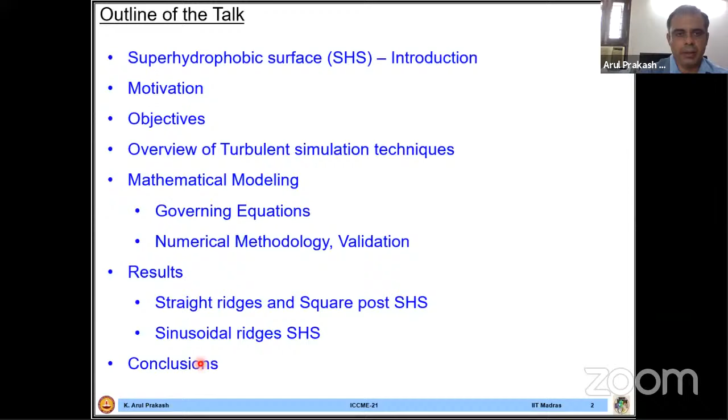Mainly we are focusing on the governing equations, the numerical methodology, and validations. Finally, we will discuss three types of superhydrophobic surfaces - two types available in the literature and scientific community, called straight ridges and square posts. And finally, we have developed a novel superhydrophobic surface in our laboratory using our past experience, which I'm going to present, showing how it is advantageous over the other two surfaces present in the literature, followed by the conclusions.

So basically, what is meant by superhydrophobic surfaces? This is a micro textured substrate with surface treatment. For example, it is available in nature in many leaves, like lotus leaves and taro leaves, and also in the wings of certain insects.

What is the advantage? When you pour water on this superhydrophobic surface, the water will not stick over the surface. So it is something like waterproof. We take this as an advantage because over this layer of the leaf or wing, there is a small layer that will resist the mixing of water with the leaves. So with the help of superhydrophobic surface, about 99% of dirt on the surface is washed away, and therefore we keep that surface almost all the time clean.

And what is the advantage is we can reduce the drag. If you coat the superhydrophobic surface and expose it to some fluid flow, we can see that compared to a normal solid surface, this superhydrophobic coated surface will have about 70% drag reduction. We control the turbulent boundary layer - in controlled experiments we have theoretically proved, and practically more than 50% drag reduction is feasible by coating these superhydrophobic surfaces.

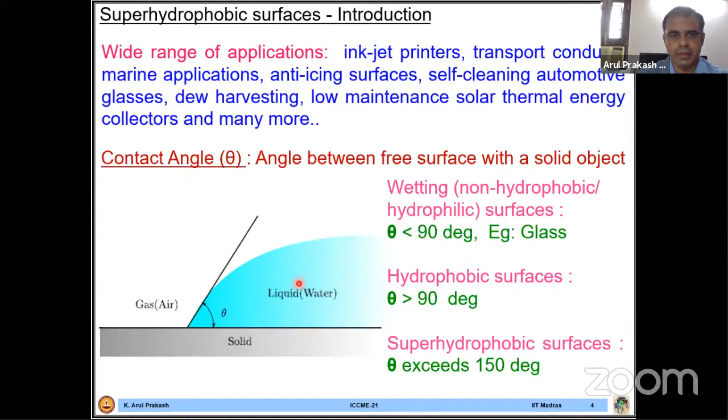So these are the small ridges, which are structured using lithography or other techniques, then we put them on the surface. That is called specifically engineered microscale structures. So the structures shown here are called ridges. You can see there is a small continuous line - this is a no-slip line, meaning flowing across the surface - and this is a post. I'll show a better picture in the next slide, showing the difference between the ridges and the posts.

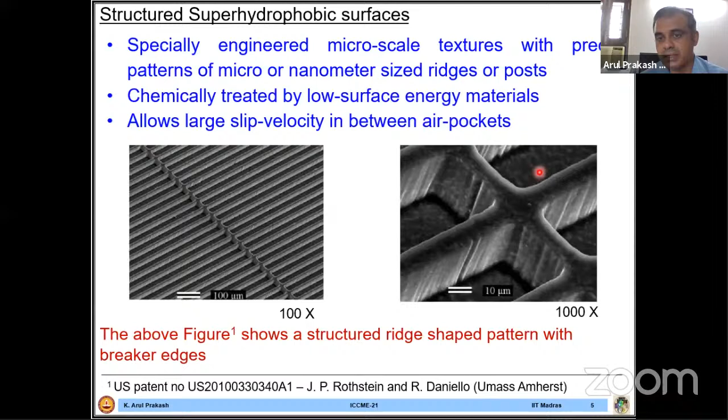So the main thing is it allows slip velocity in between. You can see there is the ridge wall, and in between this ridge wall there is an air gap. That creates a large slip velocity in between these air pockets. Similarly, in the case of posts also, you can see these are the air pockets.

So there are two types of super hydrophobic surface states available: one is called the Wenzel state, the other is the Cassie-Baxter state. In the Cassie state, this is a drop and this is the super hydrophobic surface - if the drop is not penetrating the surface, it is called the Cassie state, due to small scale surface roughness which prevents the water from penetrating.

So mainly now we are focusing on applications with respect to water, so I'm showing examples with reference to water. The small scale surface roughness prevents the water from moving into the space, resulting in an air-water interface. This is called the Cassie state, and this is truly super hydrophobic, with significant drag reduction in both laminar and turbulent flows taking place in the Cassie state.

The next one is called the Wenzel state, where the drop penetrates into the textured surface, meaning water penetrates into the corrugations of the surface. What happens in the Wenzel state is sometimes it ends up with detrimental effects, like either a drastic drag increase or sometimes no drag reduction at all. That's the difference between the Cassie state and the Wenzel state.

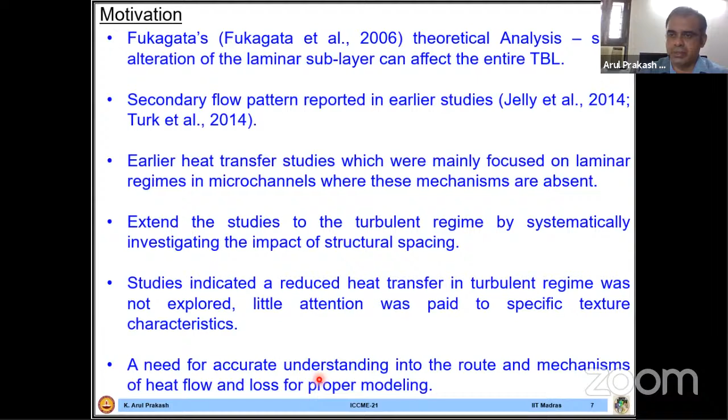So an accurate understanding of the root mechanisms of heat flow, mainly the flow characteristics, and in turn the heat transfer, mass transfer, or any other passive scalar transfer, is very much essential to use superhydrophobic surfaces in industrial or scientific applications. So that forms the motivation for our study to analyze the superhydrophobic surface. We have taken two surfaces from the literature, and one which we modified, which has enhanced performance compared to the structures present in the open literature.

So with those motivations, we have framed the objectives, that is, to investigate the effect of feature spacing on drag reduction and heat transfer over superhydrophobic surfaces using direct numerical simulations. I will also discuss different types of turbulent simulation techniques. Why did we select direct numerical simulation? Because other models will never extensively capture the physics of the superhydrophobic surface. Therefore, we are using DNS to critically assess and compare the fluid flow and thermal performance of streamwise aligned ridges and posts.

Okay, the first one is straight ridges and then square posts, aligned along the streamwise direction. So first we are going to assess and compare the fluid flow and thermal performance characteristics of streamwise aligned ridges and posts. And finally, with this knowledge, we have designed a new novel structure called sinusoidal ridges. We want to understand the effect of spatial modulation of superhydrophobic surface texture on fluid flow and heat transfer in the sinusoidal structure. So this is what we designed.

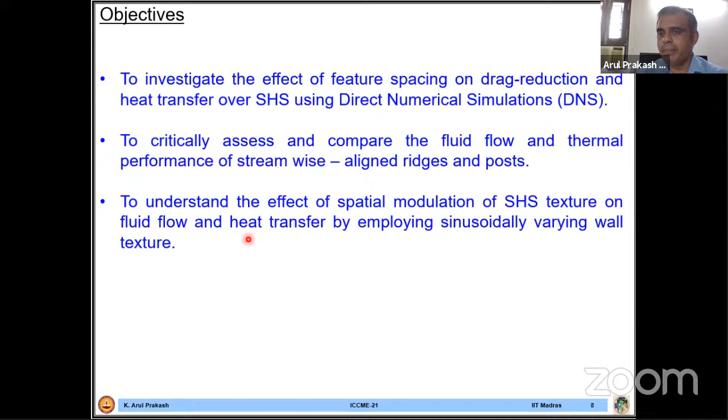So these are the main three objectives. First, we understand the effect of feature spacing on drag reduction and heat transfer over some specific superhydrophobic surfaces, mainly streamwise-aligned ridges and posts. And finally, we are going to see the effect of sinusoidal ridges on fluid flow and heat transfer, comparing with streamwise-aligned ridges and posts, and how it is advantageous for practical applications, mainly in terms of drag reduction and enhancing the heat transfer.

So with this understanding, we adopted a technique called direct numerical simulation. Why have we taken this direct numerical simulation technique? To discuss this, I will give a small introduction, just an overview of simulating a turbulent flow. The turbulent transport is mainly due to the vortical motions, that are called eddies.

You can see similar kinds of structures in our clouds. Sometimes if you look at the sky, these kinds of structures are visible. This is mainly due to the interaction between the high-speed fluid and the low-speed fluid.

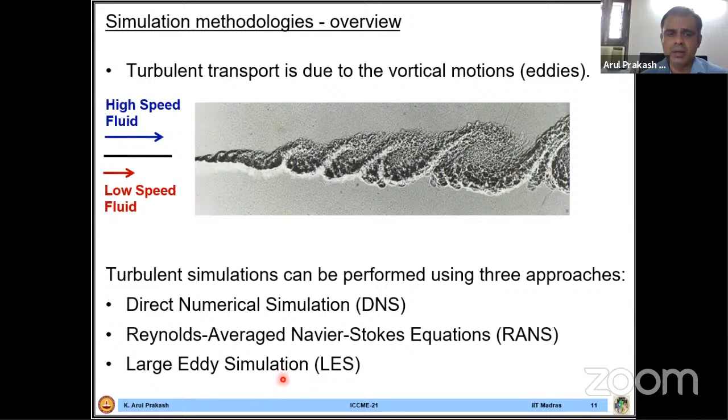So turbulent simulations can be performed using three approaches. One is called direct numerical simulation, which we are going to use in the study. The second one is called Reynolds-averaged Navier-Stokes equations, that is RANS. And the third one is called large eddy simulation, that is LES.

So what is DNS? DNS gives the full description of all the eddies. The complete description of all the eddies present in the flow domain can be captured with the help of DNS, the direct numerical simulation. Obviously, the penalty is that we have to invest a lot of computation. The computational cost is enormous in the case of direct numerical simulation.

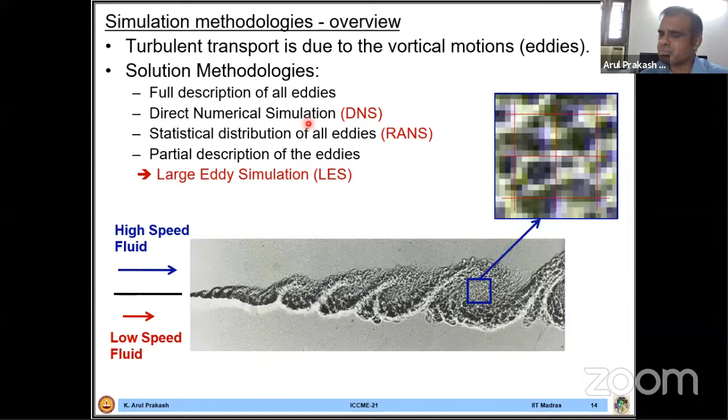And you can see that only in direct numerical simulation do we capture the complete structures of the turbulent flows. We are looking at the very micro level, and both LES and RANS are unable to capture all the structures near the sublayer level. Therefore we are using direct numerical simulation for our simulation.

Why we are using direct numerical simulation is that it gives multi-point and non-invasive information. We also get information about the frequency and the wave number. And there is no modeling at all, unlike the subgrid scale modeling in RANS and LES. We do not have any modeling in the case of DNS. Therefore, we will have increased accuracy.

We can see that if you repeat the simulations, more faithful reproduction of the flow physics is achieved with the help of direct numerical simulations. So therefore, we proceed further to model the super hydrophobic surface using direct numerical simulations.

So these are the governing equations. This is the continuity equation. Because it's water, we are assuming it is an incompressible fluid. So therefore, the governing equations are the Navier-Stokes equations. This is given by the unsteady term, convection term, the pressure term, that is the source term, and the diffusion term, and this is the continuity equation. And this is the energy equation, the convection term, and this is the diffusion term.

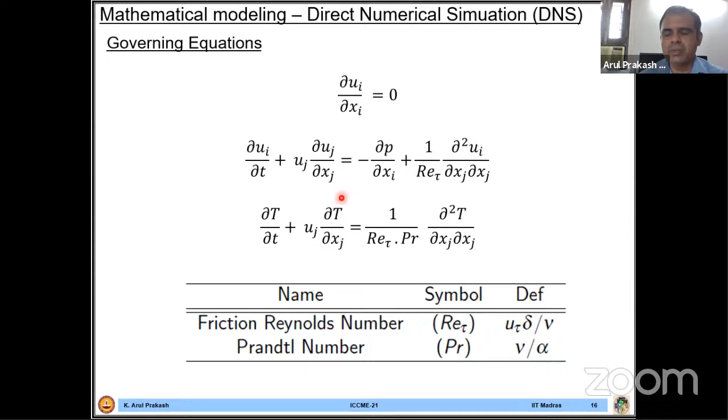And we are non-dimensionalizing this. So therefore, we are getting a term called the Reynolds number based on tau, that is called the friction Reynolds number. The velocity we are using is not the actual velocity, but the friction velocity, and the Prandtl number is the ratio of kinematic viscosity to the thermal diffusivity. And here U_i is represented as a tensor. So U, V, and W are the velocities along the X, Y, and Z directions. So we are considering Cartesian coordinates for solving this problem.

And some details about the turbulent quantity: U tau is given by the square root of tau W by rho, where tau W is the shear stress and rho is the density. In the inner layer, very near to the wall, the turbulence is universal, so independent of the rest of the flow. It behaves more like a laminar sublayer, because most of the turbulent disturbance created will dissipate in the form of heat because of the viscosity. So it depends mainly on the viscosity and the viscous shear stress near the wall.

And the friction velocity is given by this quantity. Tau W is mu into dou U by dou Y by using Newton's law of viscosity, and mu by rho, that is nu, and U bar is the mean velocity, and this is the length scale which is given by nu by U tau. In the outer layer, the influence of the viscosity becomes negligible, so we can see large structures along the outer layer, whereas near the wall it is mainly the laminar sublayer.

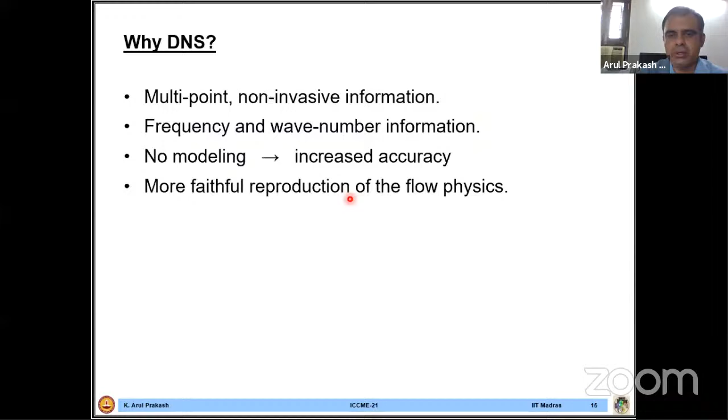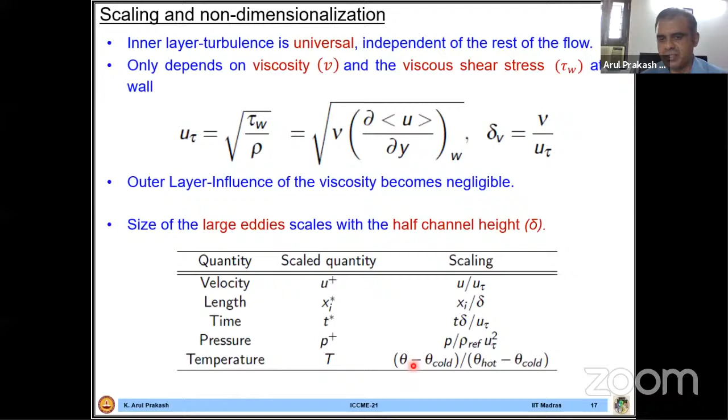So for the size of the large eddies, we are defining different parameters. We have taken the height of this super hydrophobic channel as 2 delta, so we take the half width of the channel, delta, as the characteristic length, both in the case of straight ridges and the square posts. Based on delta, we define all the quantities. So U plus is given by U by U tau, the length along the streamwise direction is given as xi star, time t star, the pressure P plus, and the temperature T, according to the scaling given on the right hand side.

So these are basically the two structures we are going to see: one has straight ridges and the other square posts. We fix the Reynolds number because, based on the literature, most studies happened at a friction Reynolds number Re tau of 180. Therefore, we fix the friction Reynolds number as 180, and the flow is driven by a pressure gradient along the streamwise direction. We give a constant pressure gradient in the streamwise direction, proportional to the friction velocity, that is rho U tau squared by delta, so that there is a velocity along the streamwise direction.

If you closely look into the surface, this is the width of the free slip surface. The distance between the two ridges is given by L, half of this is the free slip region, and half of this is the ridge length, which is given by W. We always take W equal to L. We are proceeding with this, but in practical situations this can also be varied. This is a simple assumption we have taken for solving the problem easily.

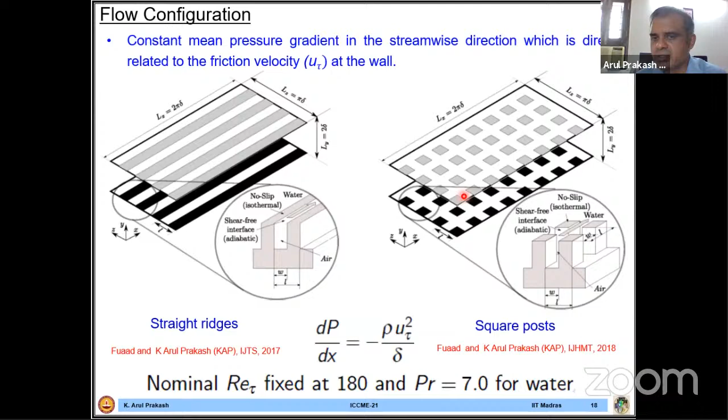And the length of the channel, because it's periodic along the streamwise and spanwise directions, we are defining in terms of pi. The length of the streamwise direction is 2 pi delta, the length of the spanwise direction is pi delta, and the height is 2 delta. These are some of the geometry specifications of this domain, and you can see the free slip region and the no slip region along the spanwise direction in the case of ridges, whereas in the case of posts it is there in both the streamwise and spanwise directions.

And these are the boundary conditions. Along the ridges, the black patch, the velocities U, V, and W are equal to 0. Along the interfaces, the white region, we have the free slip and no penetration boundary, given by dou U by dou Y equal to 0, V equal to 0, and dou W by dou Y equal to 0. That is a general free slip boundary condition given to any channel flow.

And we are heating the bottom plate in order to study the temperature variations. We heat only the no slip region with temperature T equal to 1, and the top surface is kept at the ambient condition, 0. These are non-dimensional, therefore we represent them as 1 and 0. Along the liquid gas interface, we take it as adiabatic. There is no heat transfer between the fluid and the solid surface. We always assume this is a Cassie state where the drop is not penetrating into the solid surface.

So this is the computational scheme. We have used the finite difference scheme with a fractional step method based on Kim and Moin. This is a semi-implicit time advancement. The viscous terms use the Crank-Nicolson scheme, and a second order explicit Adams-Bashforth scheme is used for convection. A fourth order central difference energy conserving scheme is used for all the spatial terms.

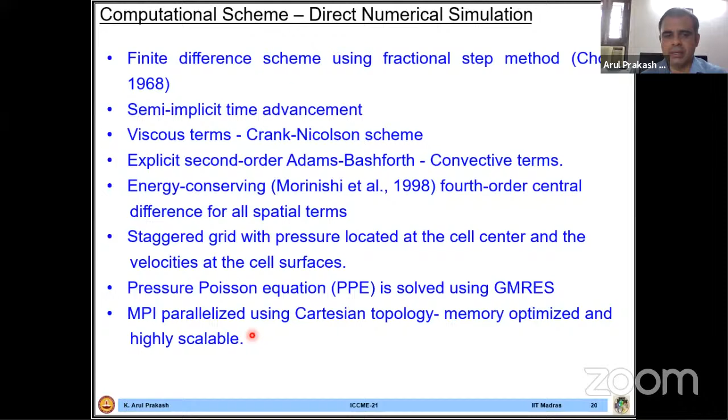And we are using a staggered grid. This is how we store the variables: the pressure is stored at the cell center, and the velocity is stored at the cell faces. The pressure Poisson equation is solved using the generalized minimal residual method. And we have also parallelized using MPI, message passing interface.

And this is the typical computational grid. This is the ridge we are showing here, and you can see the magnified image of the ridge, how fine the mesh is, so that we can capture the complete structures using our direct numerical simulations. We call this unit y plus, that is nothing but y u tau by nu. The value of y plus is almost equal to 0.1.

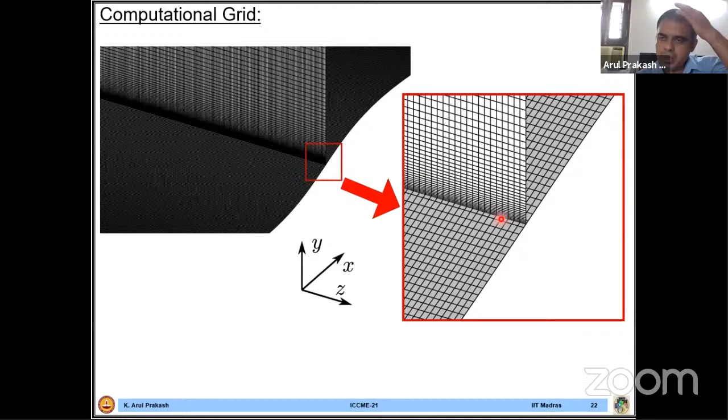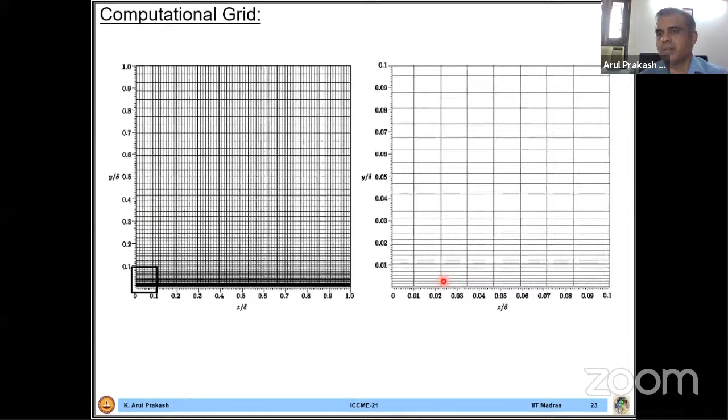And this is the typical wall normal direction, and this is your wall. The magnified view of the wall is here, so you can see 0.001 along the z direction, the spanwise direction. Along the y direction, you can see a small region covered with so many grid points, with the value of y equal to 0.1. Therefore, y plus is still a small value of the order of 0.1.

To do the validation, we have taken a simple channel. The flow is coming here, and we have taken periodic conditions along the streamwise direction and also the spanwise direction, and we are comparing the velocity.

And only in the bottom, we are giving a superhydrophobic surface. The general surface we are keeping, to see what is happening to the superhydrophobic surface, whereas in the top we are having the no slip velocity. So when you have a no slip velocity, you can see that the velocity is 0 near the wall. When you have a superhydrophobic surface, we can see that a small slip velocity is present. So this is the length of the superhydrophobic surface, the height of the superhydrophobic surface, which covers only the laminar sublayer.

So when you plot the velocity, basically it is a parabolic velocity. In the right hand side, the top region is a no slip region. We are plotting the velocity along the streamwise direction along the spanwise distance. So we can see that at the upper wall, at y equal to 2, the velocity is 0.

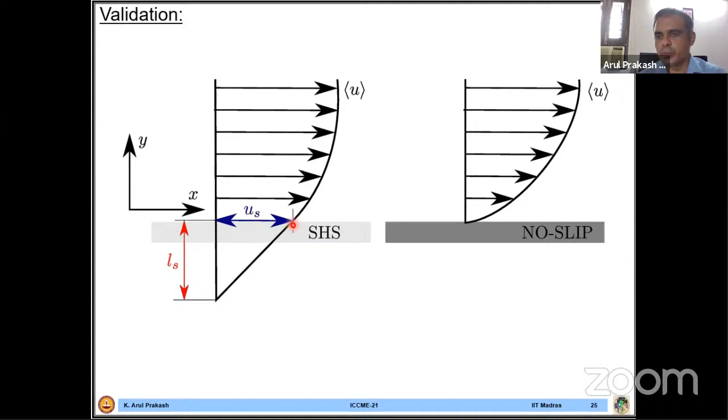Whereas in the left wall, because of the presence of the superhydrophobic surface, there is a velocity which is given by this u s, and this we compared with analytical solutions, that is Martell et al. solutions, and it is found to be nicely matching with the results, and therefore we can tell that our code is validated.

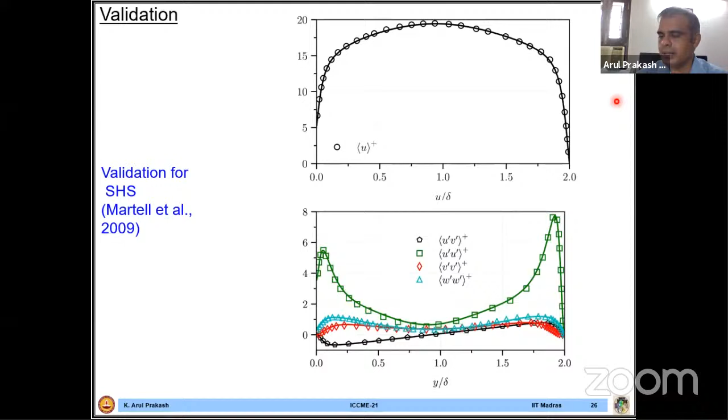And also we have compared different stresses, Reynolds stresses, that is products u' u', v' v' and w' w', and compared with the standard results of Martell et al., and we found the results to be extremely agreeing. Our scheme is good in terms of agreement with the literature data. So therefore, we proceeded further in simulating the superhydrophobic surface using our in-house code.

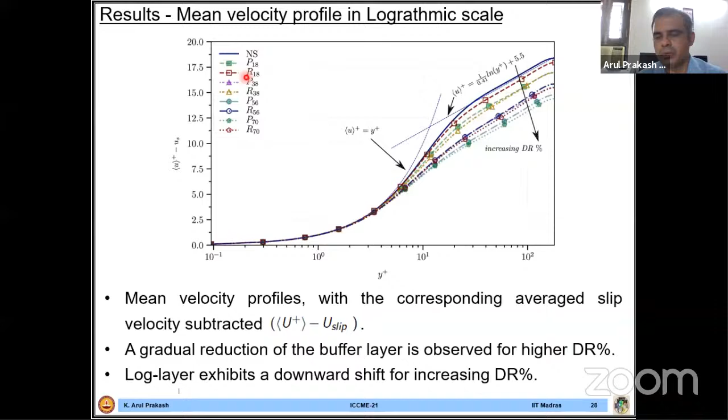Again, you can see that from the buffer layer onwards, there is a decrease in the velocity that will cause the drag reduction. By changing the distance between the posts and the ridges, the drag reduction rate keeps on increasing.

So this is the secondary flow structure. I'm having a no slip region, this is for the ridges and this is for the posts. You can see this secondary flow structure, which is caused by the presence of a no slip versus free slip boundary, and this is happening at a very micro level, only in the laminar sublayer.

Since we are heating at the bottom, we can see the appearance of a thermal boundary layer, but there is no velocity boundary layer present due to there being no wall in the case of the free slip wall, because the superhydrophobic surface has a free slip and a no slip region. Therefore there is no velocity boundary present, but you are observing the thermal boundary layer.

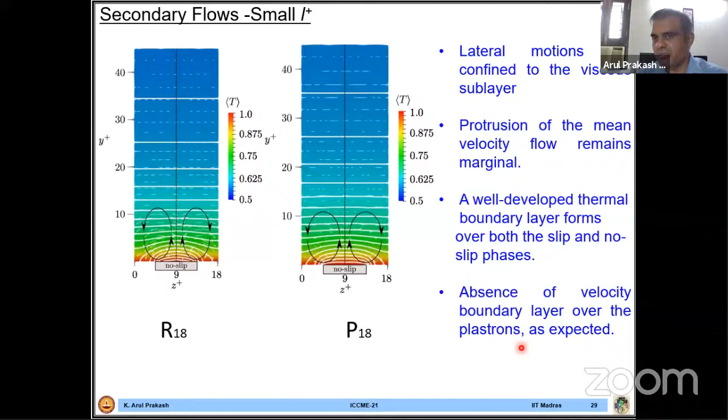The lateral motions are confined to the viscous sublayer, along the span-wise direction. Vorticities are formed, and protrusion of the mean velocity remain marginal. A well-developed thermal boundary layer is developed, whereas there is no velocity boundary layer, due to the presence of the free slip plastrons — this is nothing but the superhydrophobic free slip surface.

So the secondary motions not only help in enhancing the mixing, but will also help in reducing the velocity profile. This is because of the presence of the no slip region, where the friction present moves to the free slip region. So the effect of viscosity is reduced as we move away from the viscous region to the free slip region, thereby reducing the viscosity. Thereby, the drag reduces with the increase in the structures, from 18 to 70.

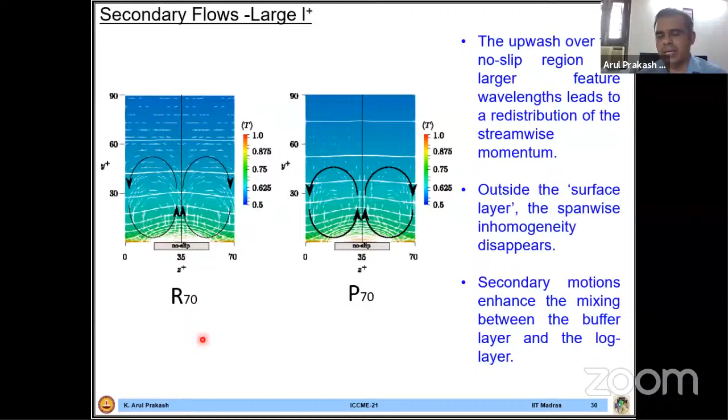I'm showing only the two limiting cases: the lower one and the larger one, 18 to 70. This is the thermal boundary layer, isothermal contour surface. Near T equals 0.9, we don't see much change because it is very close to the thermal boundary layer.

But if you go above to T equals 0.7, we can see the structures, the streaks, isothermal contours very nicely visible. You can see that in the case of ridges, the structures are not continuous, more broken compared with the posts, where the post structures are more continuous. So that is what we are observing.

I'm reproducing the same thing here. This is the velocity streaks, and this is the thermal streaks. Wherever you have the maximum velocity, you can see the minimum value of temperature. The blue color represents the minimum temperature, and the red color represents the maximum value. So wherever you have red velocity, you have minimum temperature, shown in both cases.

As I told earlier, in the case of ridges it's very broken, whereas in the case of posts it is not breaking. So in the square post, thicker, slow moving hot patches interspersed with short and intense high velocity streaks are visible, whereas in the case of ridges, disintegration of the thermal streaks is happening. These structures are available in the literature, so we reproduced this and found that the physics is almost matching with our results.

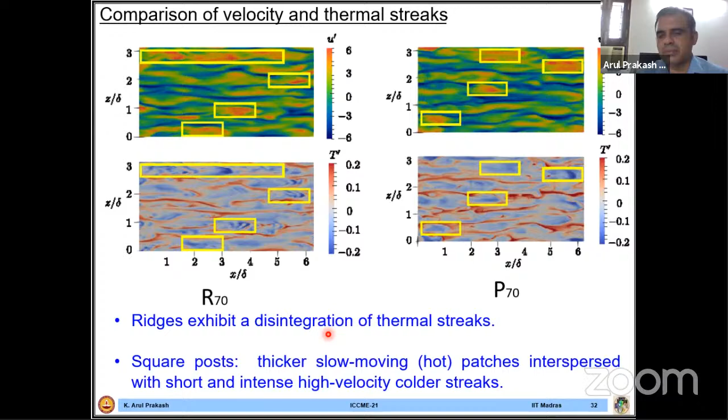When you look at the thermal profile, the temperature profile, you can see there is a reduction, because not all the solid surface is exposed to the fluid due to the presence of the superhydrophobic surface. We found that a downward shift of T plus is happening, mainly due to the reduction in surface area of the superhydrophobic surfaces.

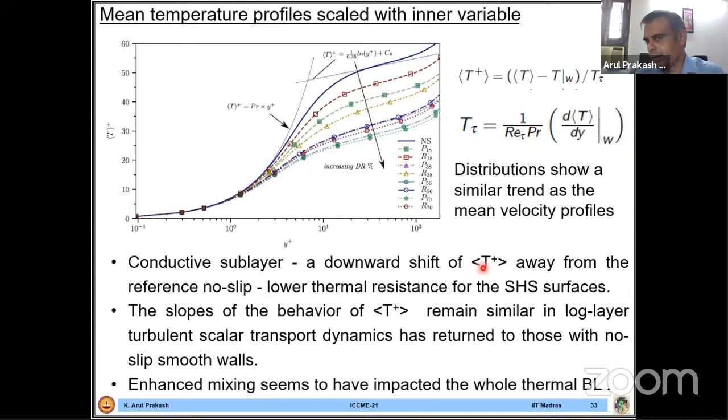So we found that there is a reduction in heat transfer, but at the same time there is an improvement in drag reduction by utilizing the superhydrophobic surfaces. This is already studied in most of the literature. And this is the turbulent Prandtl number.

We found that there is a steep decline in the Prandtl number happening near the wall, but the net Prandtl number is found to be calculated so that the correlations can be satisfied with our simulations.

Conclusions from the first part of the work: we found that the Nusselt number is reduced due to the presence of superhydrophobic surfaces, because we have both no slip and free slip walls, and that causes a reduction in heat transfer. The effect developed at the superhydrophobic surface wall results in weaker gradients of the streamwise velocity.

So we can see that there is more recirculation, but it's not having enough strength to carry the passive scalar. The mean temperature distribution is also shifted downward because of the reduction in surface area. We found that the turbulent Prandtl number for square posts is observed to be less compared to the ridges, and the correlation is satisfied. The net value of the turbulent Prandtl number comes around 0.8. But within the viscous sublayer, both the square posts and ridges show a steep drop in the turbulent Prandtl number.

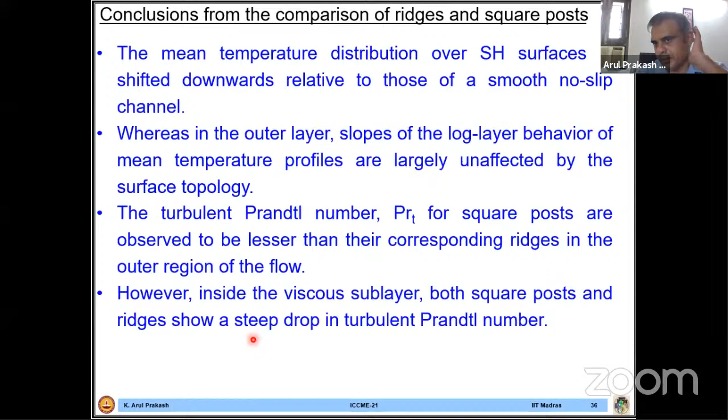With this knowledge, we went further ahead to find the structure which is common to both the straight ridges and square posts, which is called sinusoidal ridges. So what we have done is created ridges like this with a sinusoidal wave, given the same dimensions, with free slip and no slip regions.

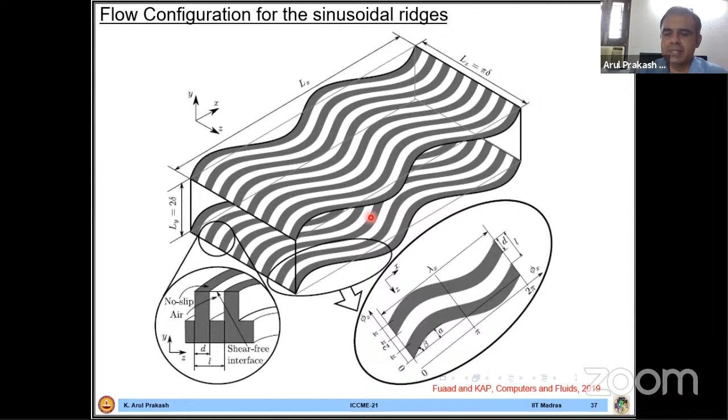There is a novel structure we have developed called sinusoidal ridges. We have changed the coordinate mapping, and due to time constraints, I am not going much into the formulation. So this is the simulation case. What I told is we are changing the wavelength.

So we have considered 6 wavelengths, that is the wave of the sine curve. We have changed from S1 at pi by 2 to S6 at 4 pi.

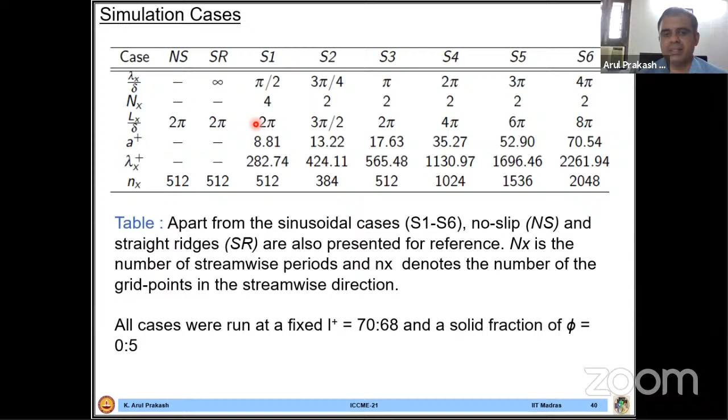For understanding and comparison, we are comparing one case with a no-slip wall, where there is no superhydrophobic surface, and another with the straight ridge. The straight ridge is more like a sinusoidal ridge, so we are comparing our results with the straight ridge and also the no-slip wall.

But the main advantage is we have improved the heat transfer performance in this case.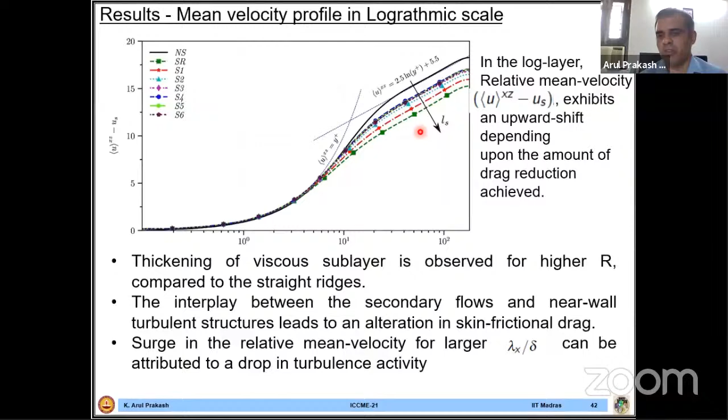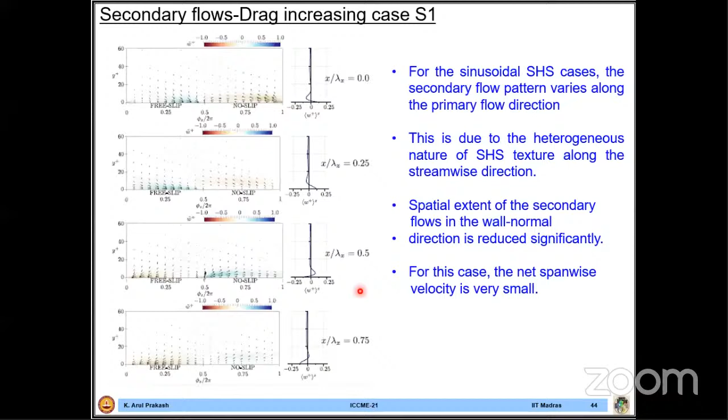We can see that the sign is changed, from positive to negative. This shows how the vorticity, means how the velocity profile is changing, and thereby how the drag is getting reduced.

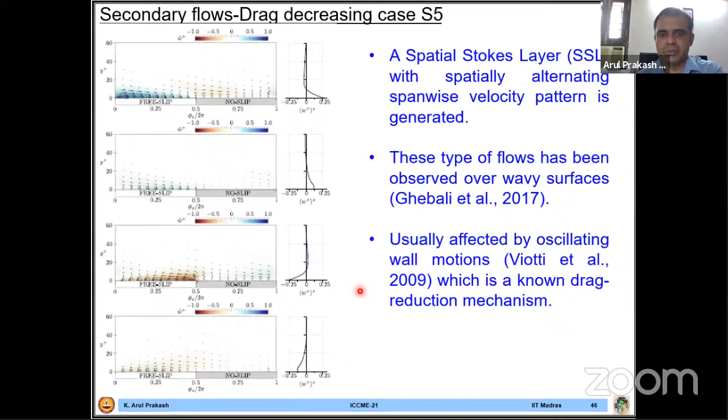We also found the spatial Stokes layer, and we calculated the vorticity generation. Vorticity is generated here, and when omega x is less than 0 it means it is intensified. When omega is greater than 0, it means it is suppressing. So vorticity is suppressed and intensified.

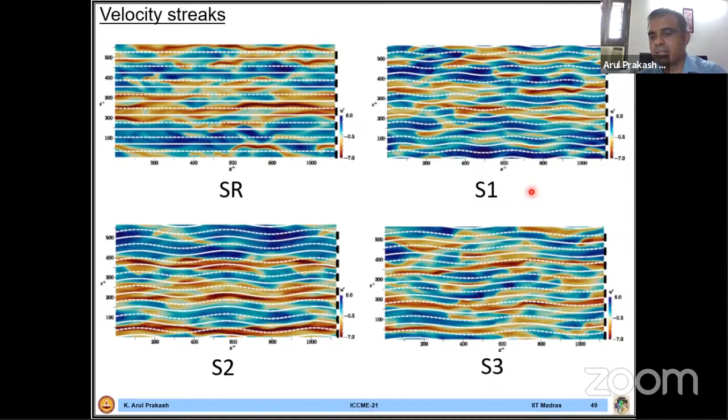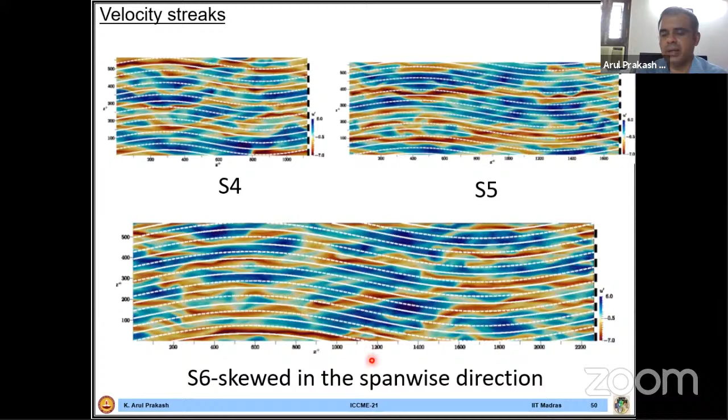We found that moving in the streamwise direction and the spanwise direction, the vorticity is intensified and suppressed. This shows the velocity streaks - this is the straight ridge, and these are the different sinusoidal ridges: 6 cases, S1 through S6, and how the vortex structures are helping improve drag reduction, which we analyzed in detail.

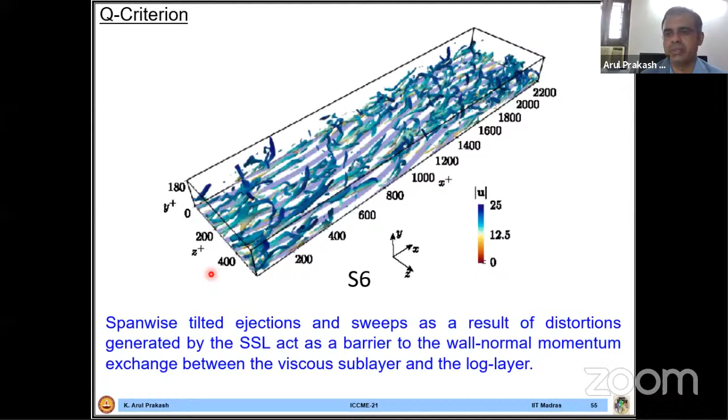So with this, I'm concluding the talk. These are some of the main conclusions. In a nutshell, the sinusoidal texture is more advantageous. Although the straight ridge and the sinusoidal ridge are comparable in terms of drag reduction, we found that there is an enhancement in heat transfer because of the sinusoidal ridge.

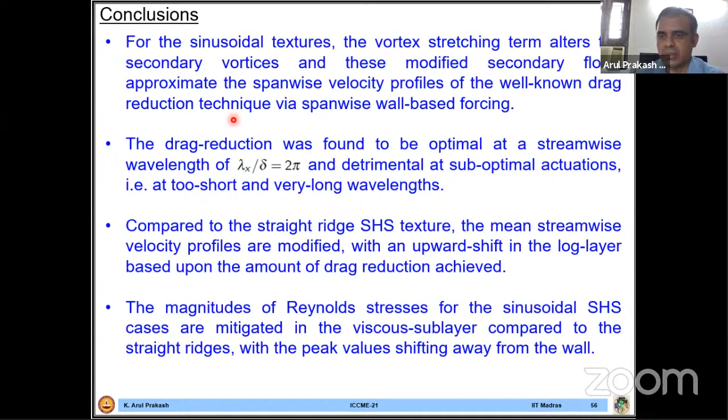Okay, so this is the last sentence. The heat transfer in the sinusoidal ridge superhydrophobic surfaces is found to be improved when compared with the straight ridges and the square post superhydrophobic surfaces. So this can be utilized not only for drag reduction studies, but also for heat transfer enhancement studies. So that's our conclusion.

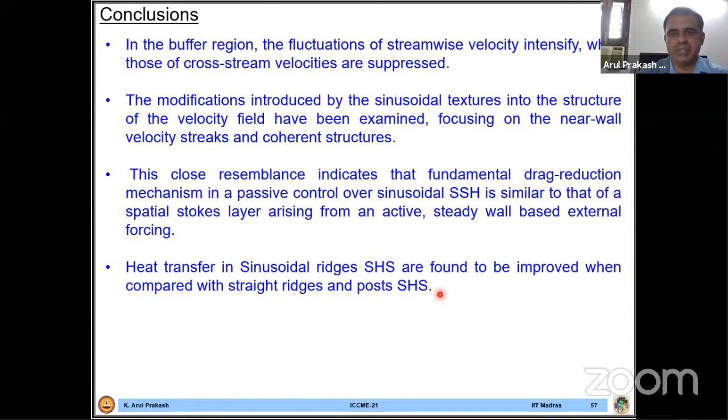And this work is done mainly as a part of the PhD work of my student Fuad. Fuad is right now in Finland as a postdoctoral researcher. So this is his PhD work.

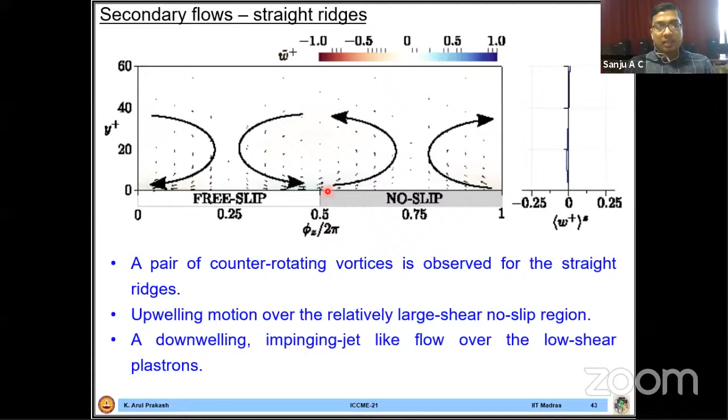It is my privilege to propose a vote of thanks on this keynote session. On behalf of the AICTE-sponsored Third International Conference on Computing in Mechanical Engineering, organized by SCMS School of Engineering and Technology, I extend a very hearty vote of thanks to Professor Dr. Arul Prakash for sharing his novel observations on turbulent fluid flow and heat transfer characteristics over textured superhydrophobic surfaces. It was quite inspiring and contained all the essence to trigger the mind of a researcher to understand the importance of analyzing fluid flow based on numerical studies. Thank you, sir, once again for sharing your valuable time with us.

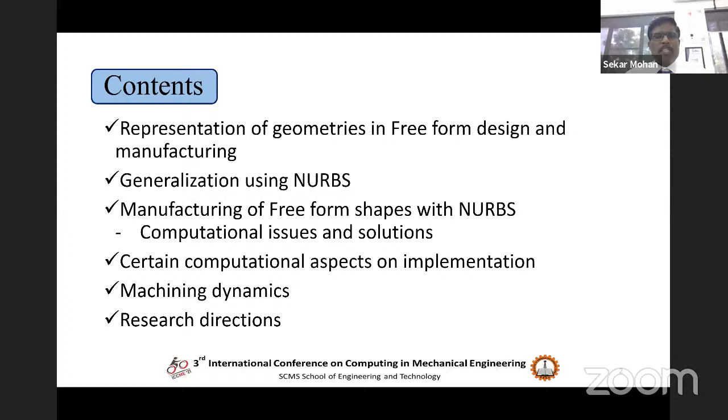Okay, this is one of the models that I have taken from the Alias model from Autodesk software. This is a pure 3-dimensional model which they have developed using freeform curves. Those who are using software like CATIA know that when we enter into the surface model, we use a lot of different shapes and curves, and we design this geometry. Nowadays, these geometries are so popular because automobile, consumer products, and especially tool and mold design need such very complex shapes.

So the CAD has been developed because it is relying on the power of the computer, and with the latest developments, these models can be easily built with the latest software. Some of the most important software that most of us know are CATIA and Autodesk Alias. There are several other software in this area. In due course, I will introduce that also. Now, what happens here?

When we design a model, for example, an aerodynamic model like this for a car, we want to design it very smoothly, and it should not be approximated by means of certain small linear segments or a combination of small straight line or curvilinear sections. Instead, we want it to be a very smooth representation.

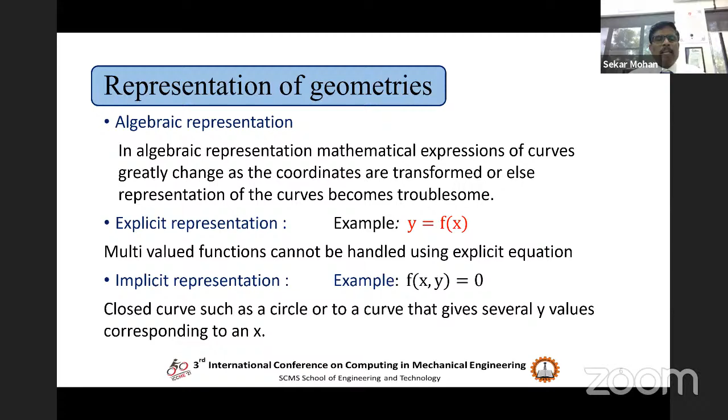The disadvantage of this explicit is that we can't help with two values. If two values are obtained, where to locate will be a problem. So we directly go for implicit representation when we have multiple values x, y, z, okay, x, y, z axis. If you want, then we go for such implicit representation.

And all these representations can be done in two ways. The first one is called as algebraic representation, where we use an equation, as I have just given in the previous slide, by using the x and y coordinate directly, so that a mathematical expression can be derived.

However, in case of a parametric representation, we go for a parameter. It is called as a dimensionless value. We call it as t, or we call it as u, or theta in most of the cases. So as a simple parametric equation for a circle, we can define with a value called theta: x is equal to r cos theta and y is equal to r sin theta.

That is one of the advantages of using parametric representation, because you can define the x, y, z vector. You can denote the coordinate as a vector, as a single point, t vector, where you can derive this with the help of a single variable called parameter variable. That is the biggest advantage.

The advantage is that you can easily extend to 2, 3, or in case of homogeneous representations, which we can use for perspective views and other views. And a closed curve can easily be determined or defined with the help of this parametric expression. With the help of parametric representation, one can go for transformations.

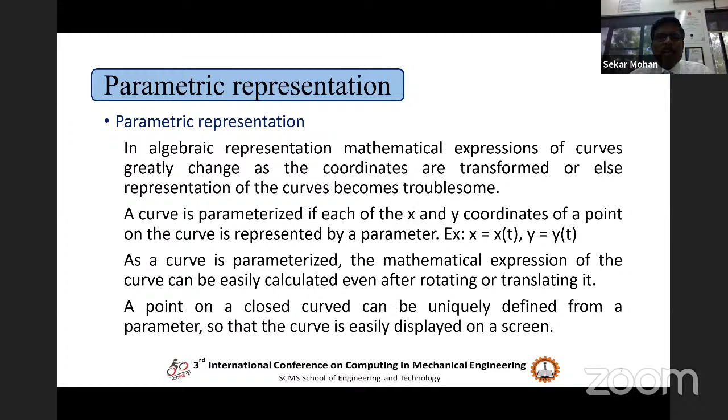So for all these reasons, the parametric representation has become very, very common in all the CAD softwares. Indirectly, in all the CAD kernels, what they use in softwares like CATIA, Parasolid, or Autodesk, they represent these things in the parametric way.

Right now, free-form geometries. The difference between the previous one and this is the free-form geometry will be controlled by means of something called as control points. The control points define the shape of the curve. This was first done by Bezier when he designed a car, and he made this smooth representation with just 4 control points. You can see that diagram.

And by moving the control points, the polygon which gets connected by these control points alters, and the entire curve also gets altered. The problem with Bezier is that suppose we want to have more control or more accuracy, we need to increase the control points. And increasing the control points increases the degree of the curve.

We know that when the degree of the curve becomes more, it becomes difficult to implement computationally. In all computers and other places, we go for second and third degree curves, which will be easy for us to work both in CAD and CAM. Especially in CAM, going for higher degrees will be always troublesome, because we have to complete everything within a very short time, what we call as sampling time of the controller, right?

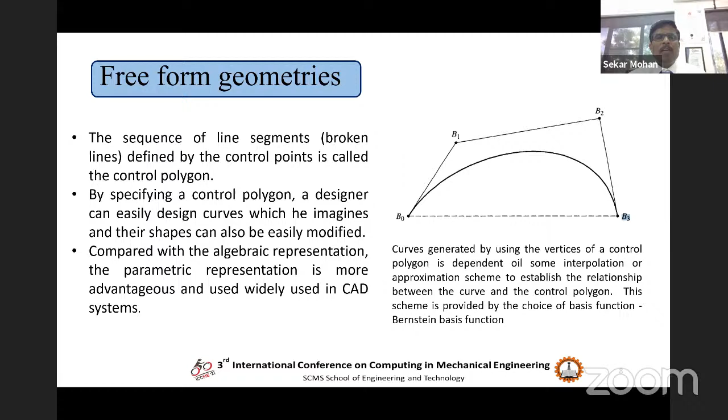So whenever we draw this curve, it is of this Bezier or B-spline or the curves that we are going to see now. So now how it can be generalized to NURBS, that I will let you know.

Am I audible, madam? Yes, sir.

You're audible. In computer-aided geometric design, the basic freeform geometry is by means of Bezier, which was further improved by another type of curve called as B-splines, and now we are working in NURBS. So what are the important components of this curve? The important components of this curve are control points, knot vector, weight vector. And we will see the global control and the C1 continuity or C2 continuity in the next slide.

Now, having understood the simple basics of Bezier, what is the problem with Bezier when we want to go for a bigger shape like car? Like the car entire model, if you want to do, then we have to split this shape into different curves, and we have to join these curves. Like the one which I have shown here, this one, sorry. The first one we call it a single span. 3 single spans put together forms a geometry that is given in the first figure.

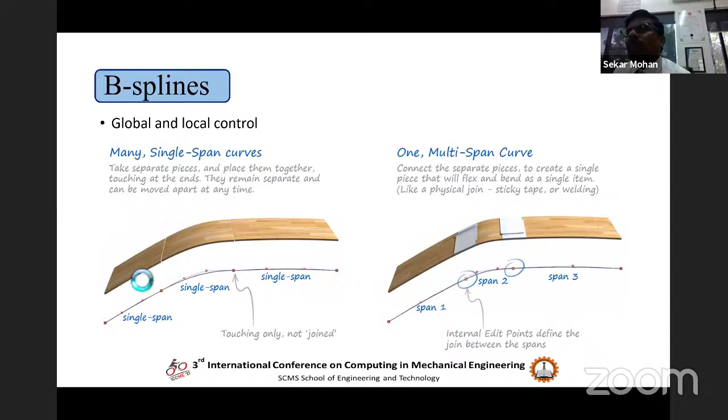Right, now how do we compute the coordinates of the nodes? I'm not dealing much with these shape functions or the piecewise polynomial functions. It is all available in standard textbooks. I will give you the textbooks also. This N is called as rational function. N of i,p is called as rational function, where this is a recursive function. Since this polynomial function is recursive, it can be very easily implemented, and compared to a Bezier curve, it requires fewer points for higher degrees.

So this sort of curve, B-spline curve, is very widely used, and when we express this in a rational form, it becomes NURBS, that is non-uniform rational B-spline curves. I will explain what is non-uniform. The knot vector, what we define, in a general case will be uniformly distributed. For example, if we say the knot vector 0, 1, 2, 3, 4, 5, 6, etc., the difference between these values, 0 to 1, 1 to 2, is fixed.

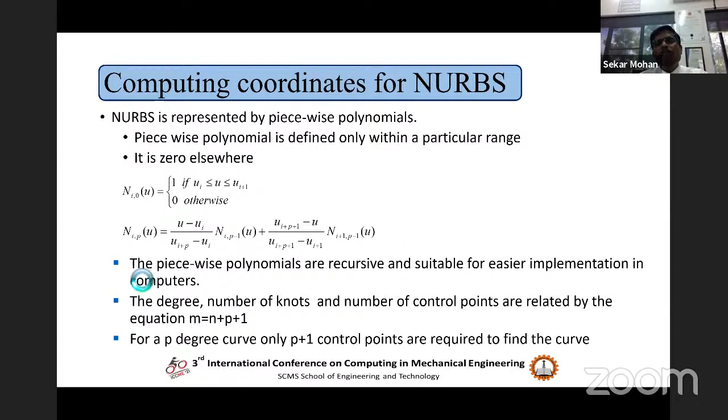It is called as uniform vector, and non-uniform gives more local control to a particular place. For example, in the previous slide you have seen, there was a curve, and we can increase the number of knots there so that it can be easily adjusted. Right. So this helps to define complicated geometries for CAD. That's why we call it as non-uniform rational B-spline curves. Right. That is the basic thing that I want to tell.

Now, with a single definition of the curve, we can go for different functions. The C of U is the curve, a vector valued function - if it is two-dimensional, when you input the parameter U, normalized from 0 to 1. In the earlier case, the knot vector could start from 0,1,2,3,4,10, etc., but we normalize it so the value starts from 0 and ends with 1. PI is the control point defined by the designer, and N of IP is the shape functions or rational basis functions, and C of U is the actual coordinate points. If we have a two-dimensional geometry like X and Y, we get C as an X,Y vector, and if 3 dimensions, X, Y, and Z.

And if we want to convert that into a homogeneous coordinate, then we have X, Y, Z, and the homogeneous coordinate representation also. The curve shown here is defined by control points where you get something like a tie knot shape, or a shape called 8. This is the rational function, and you can find different rational functions, different N of IP, in different colors.

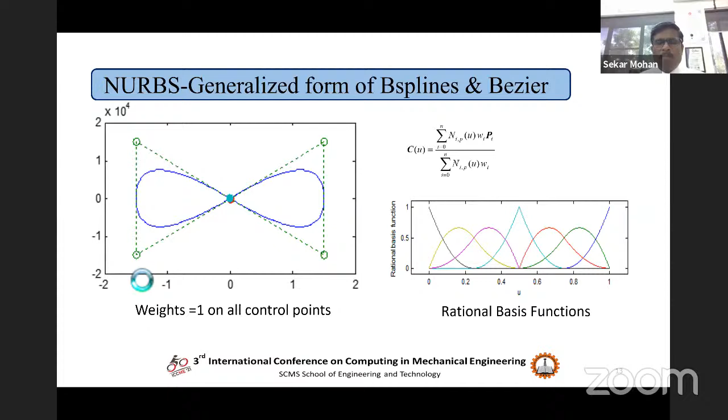Just a minute. Now, what are the issues with NURBS that I will tell.

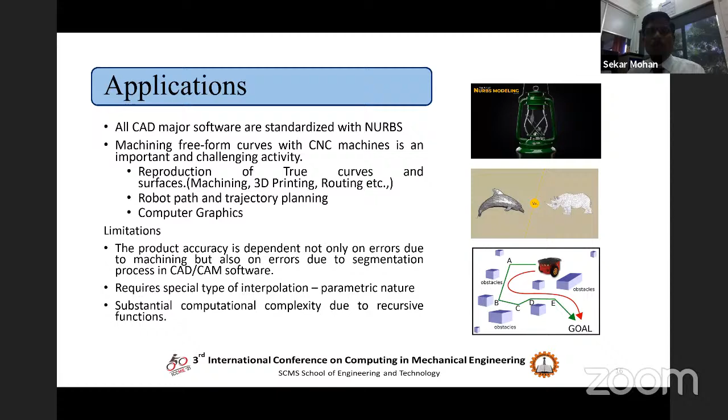The problem is mainly due to the computational complexity of this NURBS curve - that is the most important problem. Other problems, like segmentation, can be easily overcome by improving something called chord error. So there are different types of errors we follow in CNCs. The most important part is the CAD-CAM error generated by the toolpath CL data file, and we call it chord error and feed rate error.

The other type of errors are set with the hardware. The first one is called basic length unit error - for example, if you have a machine of very fine resolution, BLU will be very less, and you cannot control the machine with error less than that value. System error is what we call following error - suppose I command the machine to go to a certain point X,Y, and if the machine goes to X plus delta X and Y plus delta Y, this difference is called following error.

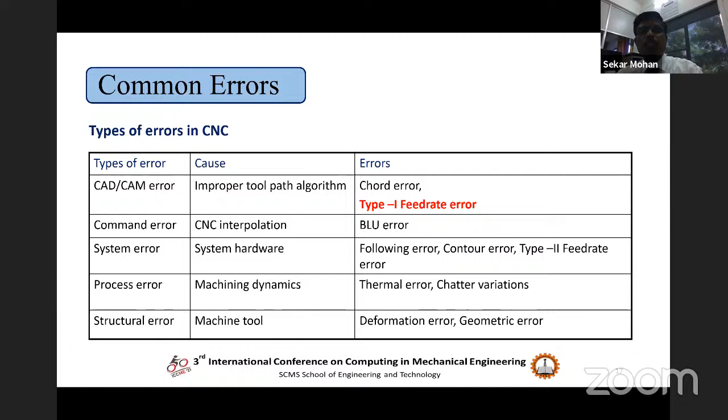When we calculate error for a contour, not on a line, we call it contour error. When we integrate with machining dynamics, we have vibration, errors due to chatter, errors due to thermal variations, that is temperature variations. And structural error, we have deformation error due to cutting forces and geometric errors. All these errors can be studied, but I'm going to concentrate only on the first part because it is more computationally intensive. The others are hardware dependent.

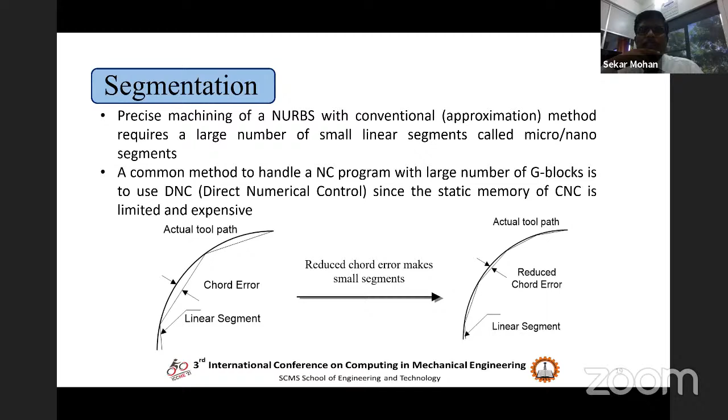So it always goes for some approximation. What is approximation here? The actual toolpath is shown in the diagram. When you approximate this with the help of linear segments, because the machine cannot follow a circular path, the machine always moves along X and Y axis, because you have X table, Y table, and Z table, and it always moves along a linear path, where the size of the linear path, when it tends to 0, will follow a circular path. So if you want a more accurate shape, we have to reduce the chord error, then the number of line segments will be more, so that the actual toolpath can be represented.

Now, DNC, direct numerical control, we can use. Why do we use DNCs? Because when a NURBS curve needs to be approximated with n number of linear segments, n can be more than 1 lakh. So we need 1 lakh G01 statements. A controller normally has limited memory and it cannot store all that. So what we do is have direct numerical control where we pass the G codes by means of a computer, and it goes to the memory of the controller, and it takes it there. This is how normally Mastercam and other software work.

For each and every linear interpolation, that is G01 to the next G01, there is a small dwell period which occurs due to the parser. In every CNC system, there is something called parsing, and this parsing has this effect. This dwell period and the rate at which transfers occur are limited by the hardware of the CNCs. Though the latest CNCs employ very good processors and other things, still we have problems, because now the aim of manufacturing has become more and more stringent. We want more and more accuracy. We want to machine more and more accurate products of complex geometries.

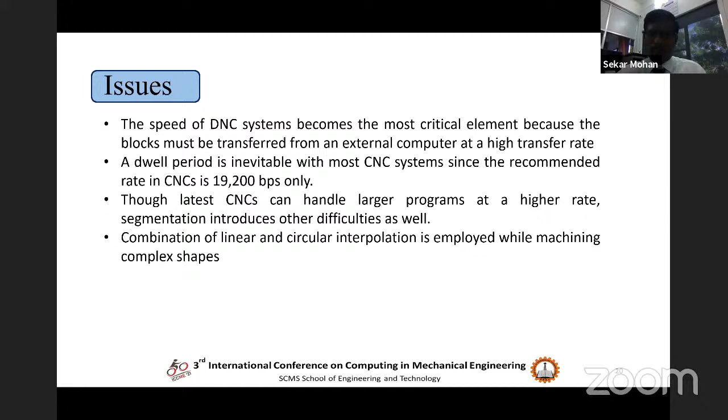Now, what happens when we have a number of straight line motions which are very short? The actual profile we follow is a trapezoidal profile. But when it becomes very short, when we have no time for this constant profile, it becomes a triangular profile. The machine moves from a lower feed rate, immediately goes to a higher feed rate, then drops down. And when we have a series of triangular motions like this, the machine will start to vibrate, and the controller stability is also questioned, and the machine tool stability also gets into problem.

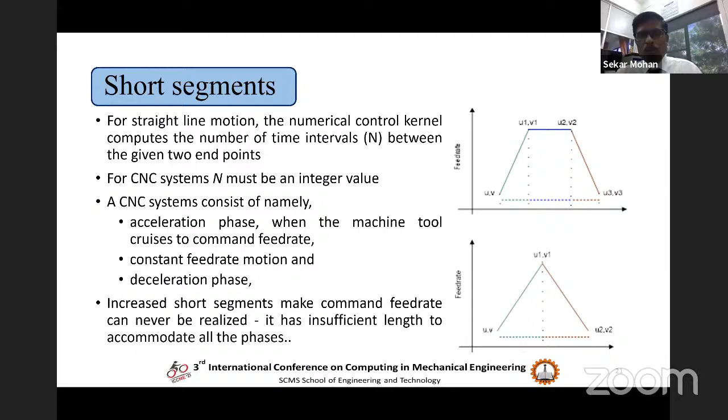This becomes an important critical factor, because the processor has to spend some time, which is called BPT or block processing time. Normally in a control system, the time spent for calculating the interpolation algorithm and the control loops and feedback loops is very important. And if we overload this with BPT, that is block processing time, the controller accuracy becomes reduced.

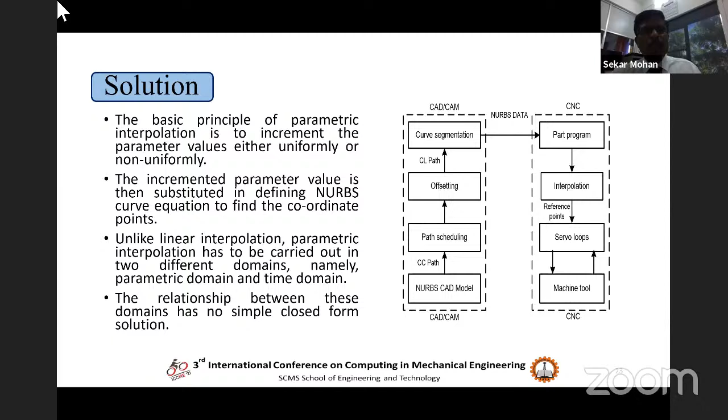Now the solution for all these things occurs by means of parametric interpolation, where we directly go for parametric increments. So these are the three types of parametric increments. For example, in the initial slides you might have seen that C of U, a curve of U parameter, can be obtained by substituting U value.

When we increase this U based on say 0.001, suppose the U value is 0.2 plus 0.001, that is delta U. If we make it constant, we call it constant parametric increment. And the next one is based on the Taylor expansion method that we are going to see now.

And in case of curve modification, we just modify the curve into a different form of curves, like bringing it back to quintic splines or Pythagorean hodograph, or the conventional method of approximating into n number of linear segments.

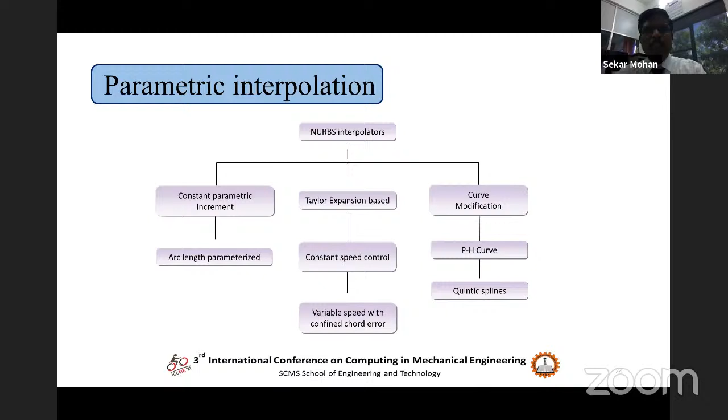This is the simplest form of Taylor's interpolation series, and for computational complexity of higher order derivatives, we remove the higher order terms. Why? Because we are going to use this in CNC machines. Differentiating higher order terms of a complex NURBS curve is really computationally intensive.

Some may say, sir, if I know the length, can we parameterize it? No, it is not possible, because for a given u value, the length cannot be computed, because there is no closed form solution. What is a closed form solution?

For example, there is a circle. If we want to find the circumference of the circle, we say it as 2 pi r. In a NURBS curve, there is no such formula. So we cannot determine the length of the curve by just giving a parametric value u. So it becomes another complexity.

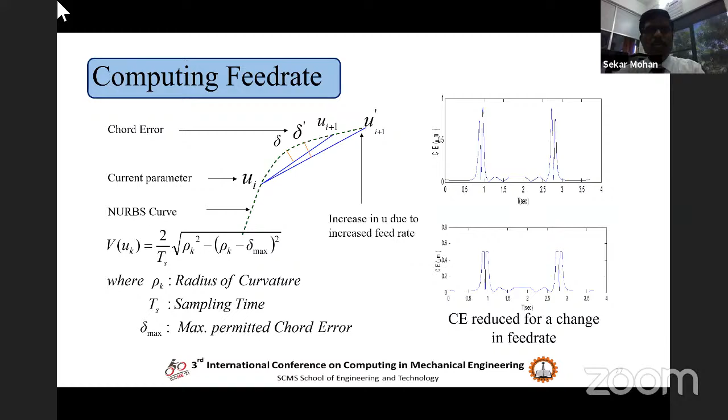That can be obtained, the radius of curvature can be obtained from the second derivative. So this is the curvature analysis. Whenever the feed rate goes down, it means we have reached a point and we have to slow down the machine, and this point may correspond to a sharp corner or a cusp in a surface geometry or in a curve geometry.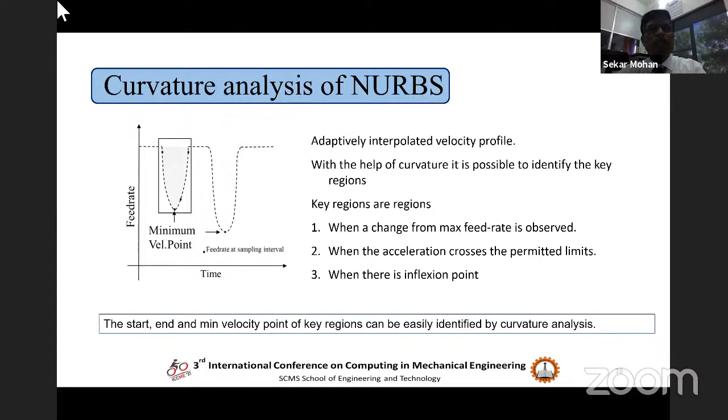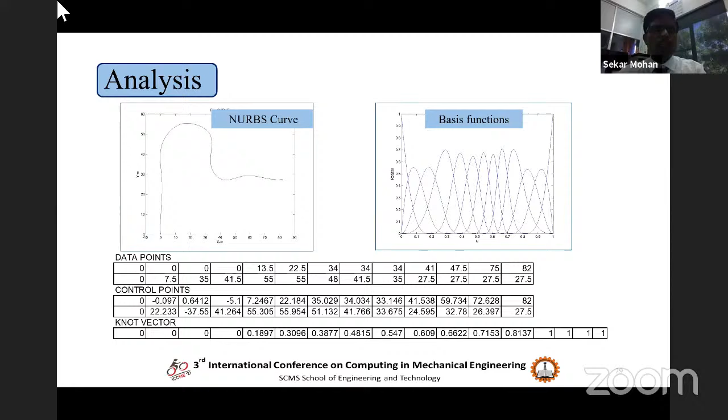Now, I have drawn a simple open NURBS curve, and the rational basis functions are given here. The data points, control points are given here. The knot vector is given also. Now, you can find the curvature vector.

So in the same case, if the tool movement is done without any smooth process, the tool will break. So these are the internal complexities that we never understand, because we just follow the CNC G codes, and finally we come with a blunt tool, and no one knows why this tool has become blunt suddenly, right? These issues often the machinists know, but it will come through the CAM code, the code generated from the CAM software. So such points are called inflection points, where the curvature changes from positive to negative.

At this point, though it looks smooth, your machine tool or the machine control should slow down the machine. It should know where this curvature comes. Such intelligence must be built or coded in the G code itself. So I have simplified this.

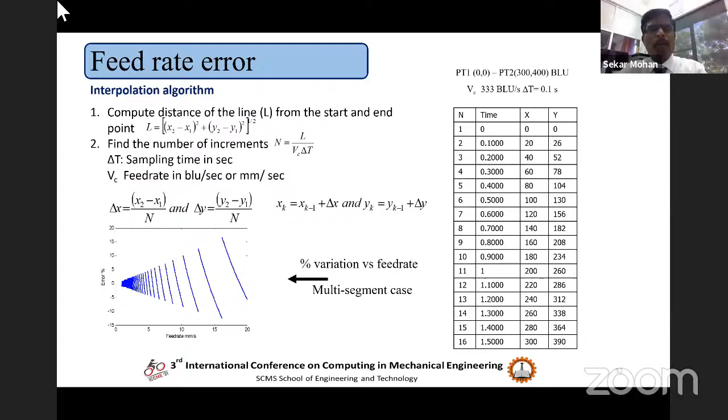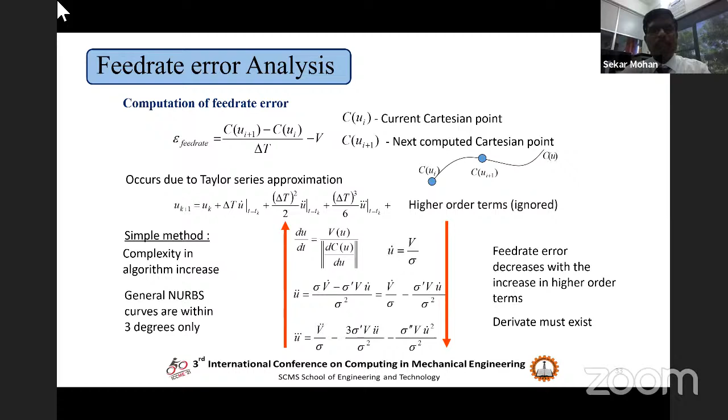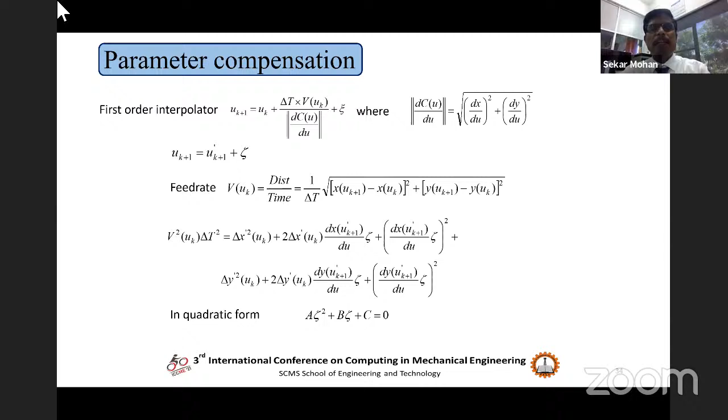The simple method proposed is to add a correction factor with the value of u, that is shown in the next slide. See what we do. So the zeta value is added to the parameter, not the velocity. So if we want to compute the next increment value of uk, it can be obtained from the quadratic equation a zeta squared plus b zeta plus c, and if we solve for the positive value of zeta and add it to uk, then we will get the refined incremental value of u, so that the feed rate error is reduced. I have given this feed rate. You can find the feed rate value has drastically dropped in the extreme curve of this open NURBS curve.

In the NURBS curve, you can find it consists of both a linear segment, something like a parabolic segment, and other things. Right? I will go to the aspects of implementation.

Madam, do I have time? Right. Yes, sir. You can proceed. No problem. Yeah, I will just rush a little bit fast.

See, there are three types of CNCs currently we are employing. The conventional CNCs, most of you know, and the other is the external motion control board. Normally, this is called PC-based CNCs. The PC-based CNCs operate with a real-time operating system called RTOS or Win RTX. And there is something called Open CNC. Nowadays it is getting developed, where you can find open source, like Linux Open CNC, and some other Open CNCs are available in the market.

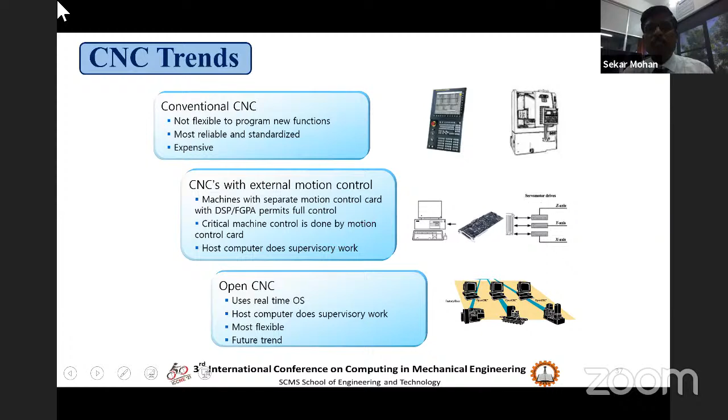Now, how we implement in real time? There are different types of implementations. One implementation is through MATLAB, where we use something called Real-Time Workshop. Most mechanical engineers may not use this Real-Time Workshop. It is a very simple tool where if you have a target board, you can use dSPACE or Delta Tau or even Arduino or Raspberry Pi. Whatever code you write in MATLAB, when you specify this on the Real-Time Workshop, the code is exported to that particular controller. We call it the target board.

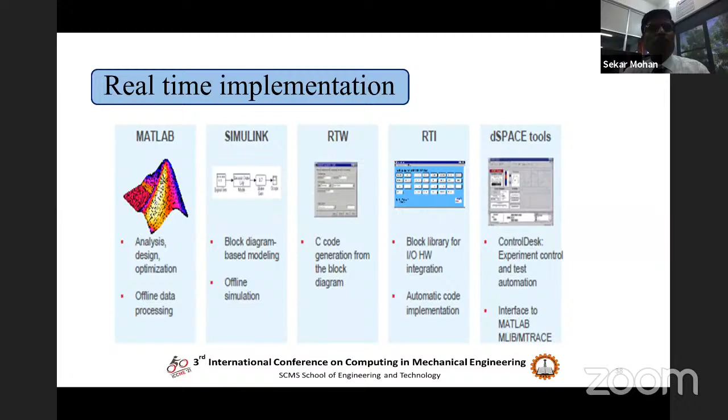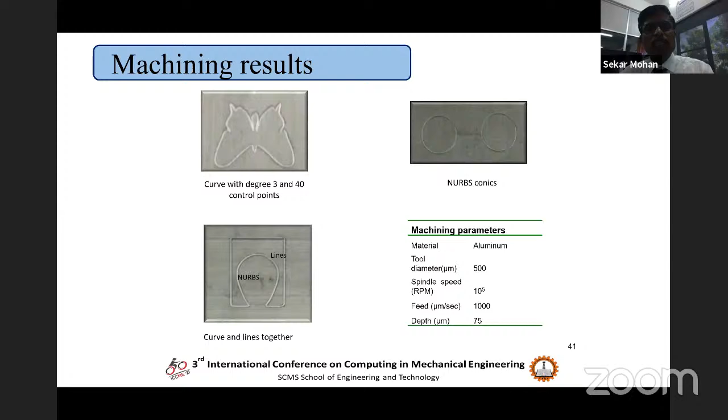Some of the machining results: the circle is generated, a complex butterfly geometry, and a combination of a parabola and line is also generated, all with a single curve. Please note that this is a single curve. I skip this for want of time. I'm coming to the directions for future research. The most important part is that you can develop your own interpolator, and we can generalize the interpolator. I will explain all these things. Time optimal solutions, how we can represent NURBS in an alternate way, and the emerging ML techniques.

Excuse me. Madam, can you see my screen? Yes, sir. We can see the research directions. Is it blinking? No, nothing is there, sir. It's good. Okay, right. Because in my screen it is not stable.

Now I will explain this. This will be useful for future researchers. From the Indian perspective, because most of the faculty members and researchers are attending from India, the amount of research in this area, especially in CAM, is very less. Why? It requires knowledge in mechanical engineering, machine tools, computational geometry, controllers, and some coding, basic C and other things. It requires a multidisciplinary approach. If you are not a programmer, you will find it very difficult to manage.

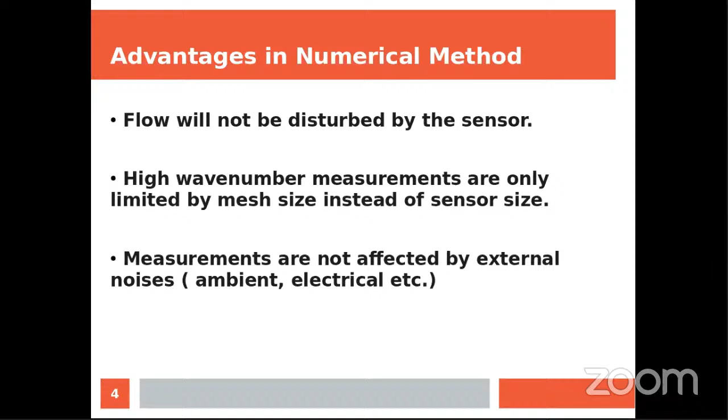Then, in numerical methods, measurements are not affected by external noises, such as electrical noises and ambient noises, which can interfere with these pressure measurements.

And the advantage with the experiment is that when we measure pressure fluctuations at low wave number, that means for a long distance, that is very easy with the experimental setup because we only need to place sensors very far apart. But in the case of a numerical method, the disadvantage is that we have to create a long domain. Then solving that mesh on a small computer system will be very difficult. That will not be feasible. But that difficulty will not be in an experiment.

And the other thing is that when we measure high frequency fluctuations in a real world experiment, high frequency fluctuations mean how quickly we are measuring the pressure. That is only limited by the response time of the sensor, how fast the sensor can pick up the pressure fluctuations. And it doesn't affect how much time we are running for. But in the case of a simulation,

the time step with which you are simulating the problem is the main factor affecting the high frequency measurement. And if you are reducing the time step to a very low value, that will affect the total duration of the simulation. In some cases it can take months to complete a simulation. So that is a huge factor in making these kinds of problems industrially viable.

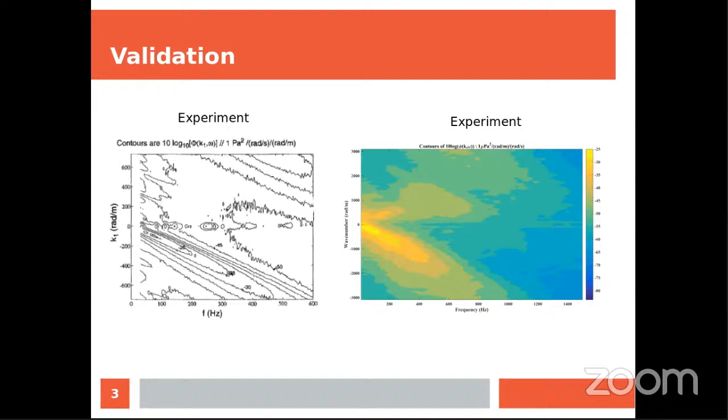Thank you, sir. Thank you for sharing your experience and giving an insight into your research project at the DRDO. So, Mr. Kunjini has enlightened us on the advantages of both numerical analysis as well as experimentation.